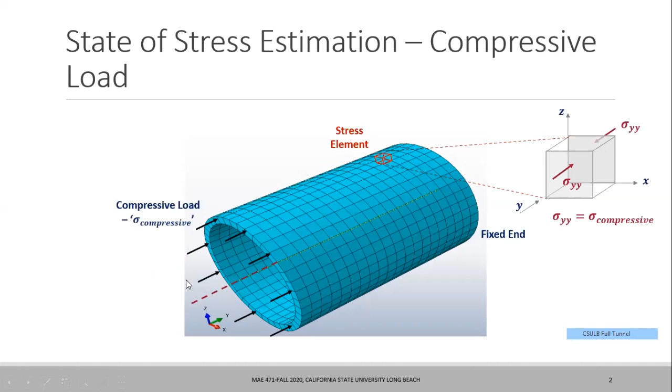If I go back one more slide, this is about the axial stresses. Here also you see sigma yy compressive acting on the back face and the front face, but there is no such increment of the stress being shown. It's just sigma compressive that's being applied. Coming back to shear stresses, back face and front face have the same magnitude, no increment or decrement.

But the moment I talk about the bending stresses, I am adding this delta. So can anybody try to attempt why it is happening?

Is it because the back face is fixed? Back face is fixed, but that is a part of the boundary condition. That is fixed in all the other cases too, so it is fixed in this case as well.

Wait, can you re-explain, Professor, how the previous one relates to this one? Can you re-explain how the torque relates to the other one, or what you said previously? The torque does not relate to the third slide.

This torque is basically you just twisting it. Imagine you are screwing or unscrewing a fastener, or just twisting the cap of a bottle. So you're applying a twisting moment, trying to rotate the cross section about its axis. That is what your twisting moment means here. Do you see what I'm saying?

Oh yeah, it's like if you're holding the end and twisting it. Yes, but when I'm talking about this bending load, I'm not twisting it. I'm just applying a load at the free end, just like a cantilever beam, pulling it in the negative z direction at the bottom. So I'm just pulling it.

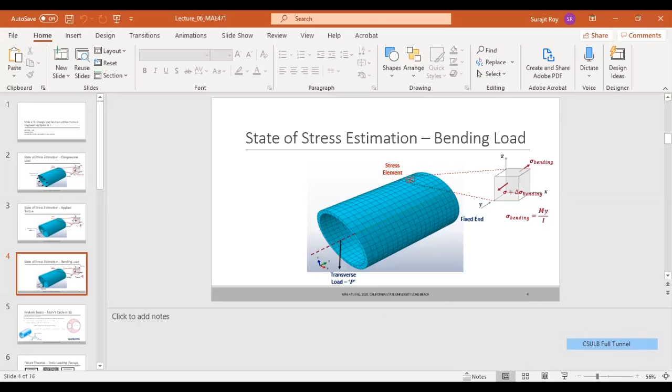Yes, that's the correct answer. So let me actually share the document and show this. If you see this specific scenario where you have a cantilever beam...

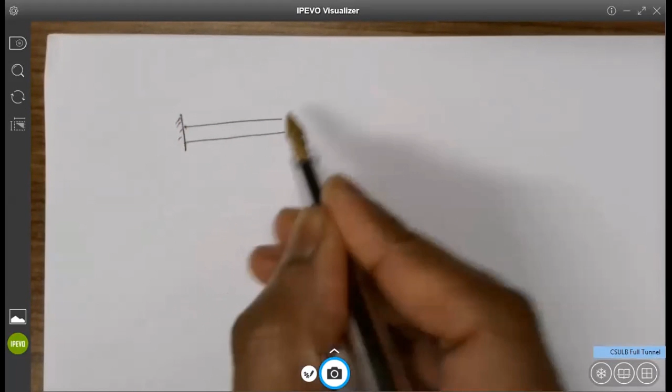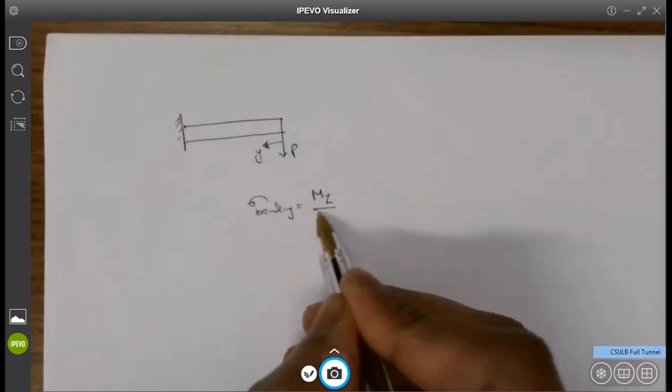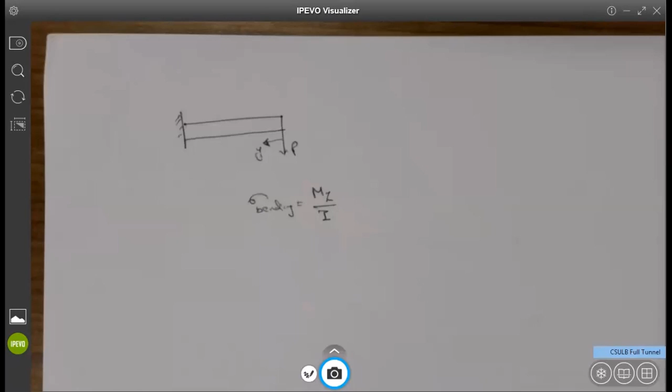Let's say this is y. Now sigma bending is given by mz divided by I, right? That's what it actually has to be - z, not y, in my slides. So it should be mz divided by I. Is everybody following it so far? What I'm writing here? Yes, we are.

So what should be the axis here? It should be z here. So it is z, and x is here. Let me know if this makes sense - the Cartesian coordinate system I'm drawing. It's a right-hand coordinate system. X-axis is across; this is the cross section of this beam.

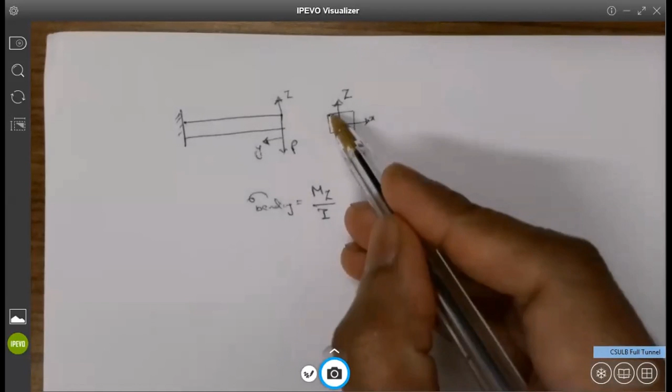X-axis, Z-axis, and this is the longitudinal axis. Y direction, Y coordinate is pointing this way, Z is pointing this way. Let me know if you guys agree with this. Yeah, yes, everybody is good, fine.

Now, what I am saying is that bending stresses, sigma bending - because of this, everybody agrees this will actually deflect just like a cantilever beam, where the top part will be in tension, the bottom part will be in compression. The tension stresses will be calculated by this formula: M times Z, bending moment times Z, where Z is the distance from the neutral axis.

So if this is your neutral axis, the stress is distance from the neutral axis divided by the moment of inertia, or area moment of inertia. Everybody agrees with me?

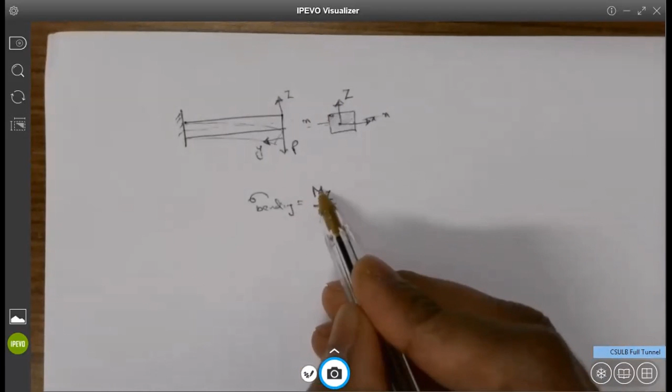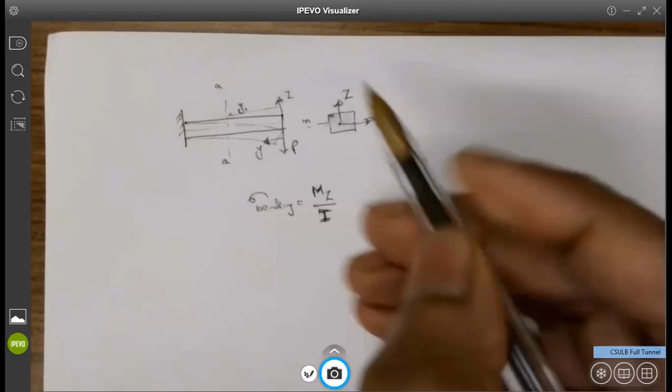Now, if you look at this specific term, bending moment is calculated at a specific distance from the free end. So at the free end, after a distance y1 from the free end, the bending moment at this cross section would be what? Bending moment at section AA would be P times y1.

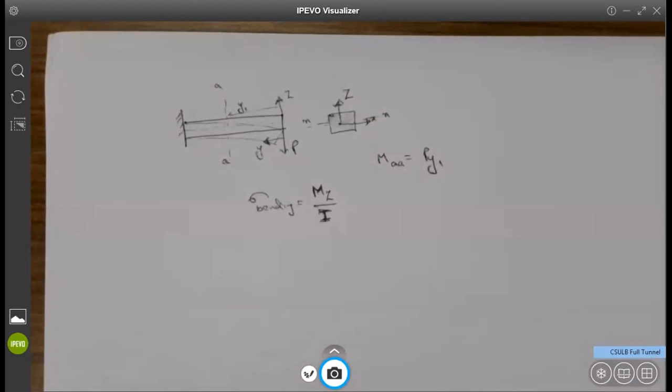And if I have a cross section slightly away from AA at a delta y increment, what would be my bending moment? My bending moment would be P, load remains same, but instead of y1, it will be y1 plus delta y.

Is everybody agreeing with that? And because of this, the stress at the front face will be a function of only y1, and the stress at the back face would be a function of y1 plus delta y. So because of the delta y increment, the bending moment actually changes, and because the bending moment changes, my stresses will also change.

Sigma AA would be MAA times Z divided by I. Sigma BB will be MBB multiplied by Z divided by I.

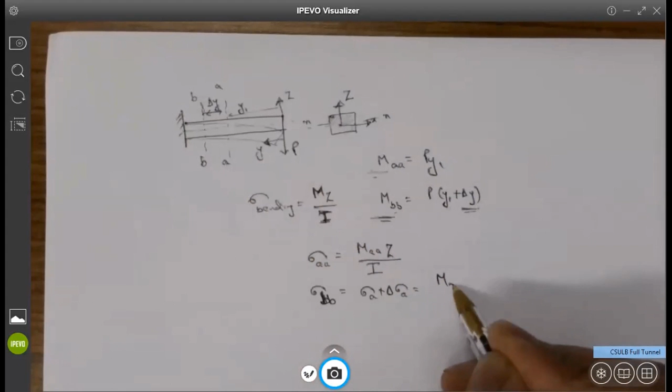Is everybody following what I'm trying to say? I'm asking everybody if you are following it or you are not. If you are not, let me know. If you are with me, then we will move to the next slide.

Can you just give us a sec to copy, Professor? I don't know about anyone else, but it kind of got stuck for a couple seconds while you were writing that bottom part. I believe it's the Wi-Fi signal causing issues, since I'm basically taking the class from the college, so I'm not sure how to increase that signal strength and bandwidth.

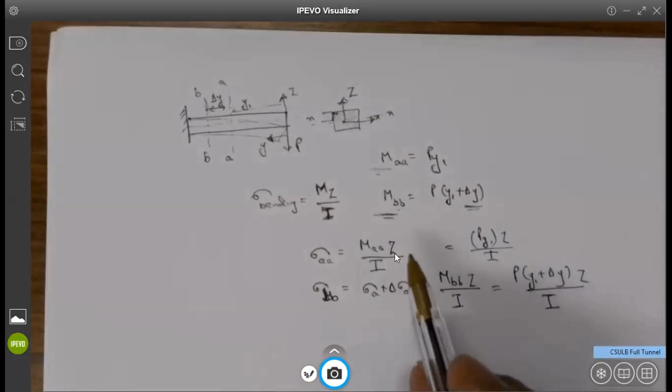So right under where you have stress AA equals the moment AA times that Z, what does that Z represent? Z represents a distance from the neutral axis. Oh, okay, it seemed like you were multiplying it as a variable, that's why I got confused. Sorry, that's okay. So sigma AA equals MAA times Z divided by I.

Is everybody with me? Any questions, guys? I just have one question. At the moment for BB, why is it y1 plus delta y, and why is it not minus delta y?

Because you are increasing the distance from the free end. You are basically calculating the distance from the application of load to this point, which is y1. Now you are incrementing delta y. Delta y can be positive or negative depending on which side you are talking about delta y relative to this end.

Since my y is positive, y is going inwards in this direction. That's why I asked you guys to make sure you agree with me on the coordinate system: y is positive going this way, z is up, and x is this direction. If you agree with me on this coordinate system, then delta y is positive going this way. Okay, that makes sense, thank you.

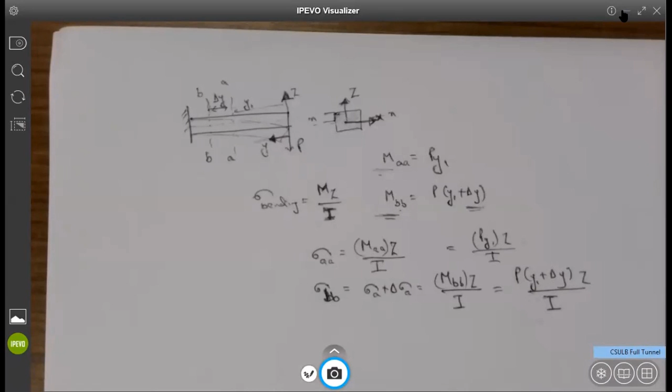Okay, so everybody agrees now, or understands why I put the delta increment here. Now I just changed here, Z, it has to be Z in the slides I uploaded to Beachboard. It's not Z, it's written Y. It should not be Y, it should be Z, so you have to make the correction, or I will upload the new slides later on.

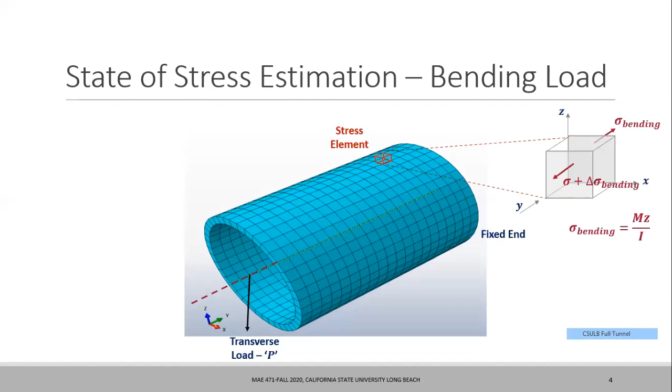Okay, so with that said, this clears some of the concepts we've been covering so far about stresses due to independent bending moment, independent twisting moment, and independent axial stress. Now, most of the time, in the design of machine components or any engineering or structural component you work with, the loads will be a combination of bending, twisting, and axial. You will never have a situation where it is only bending, or only compressive or tensile, or only twisting.

If you have all different combinations of loads appearing, what type of stresses will be appearing in the material, and how do we take into account all the different combinations of stresses? That is why we talk about the Mohr circle. Last time we talked about how the Mohr circle can be used to determine the principal stresses and help us identify which plane or how the failure will take place in a material. For ductile materials, we saw that they are weak in shear and basically fail at the value of the maximum shear stress.

If you have a Mohr circle, imagine we always constructed it using the planar case. For a 3-dimensional situation, you have 3 Mohr circles, corresponding to 3 planes: XY plane, XZ plane, YZ plane.

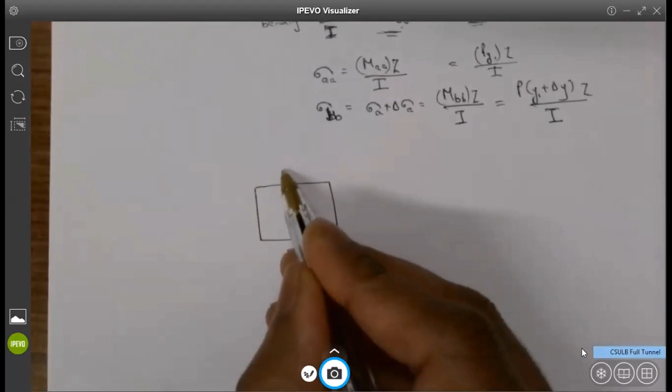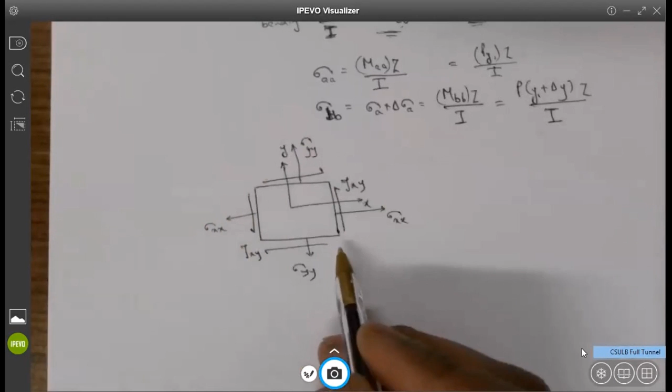While we were having our discussion on the Mohr circle, I told you we are going to talk about the XY plane. I have sigma XX, I have sigma YY, then I have tau XY. This is a representation of stresses in plane, a planar representation of stresses.

Are you guys with me so far? Yes, instead of working on a three-dimensional situation, I'm talking about a plane. Now, plane is only the XY plane. I can also have the YZ plane, I can have the XZ plane.

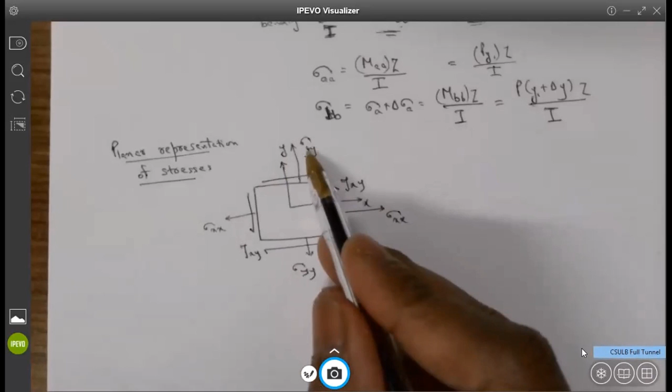If I have the XZ plane, then instead of YY, I will have ZZ. We've had this discussion about how the change in axis or plane will change the subscripts. So if I have the XY plane, I have sigma XX, sigma YY, tau XY. If I have the XZ plane, it will be sigma XX, sigma ZZ, tau XZ. So depending on which plane you are in, you will have these subscripts.

Now for one plane, let's say the XY plane, you can also call this the 1-2 plane. You know we talked about the Mohr circle representation where we have all the normal stresses on the horizontal axis. This is tau clockwise and this is tau counterclockwise. I hope you understand by now what tau clockwise and counterclockwise means.

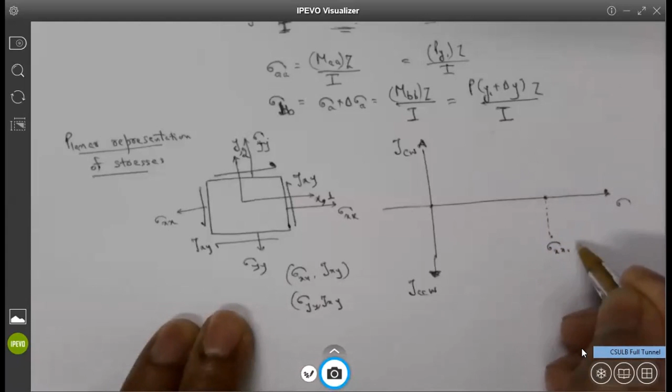To draw the Mohr circle, we take 2 points: sigma xx and tau xy, and another point would be sigma yy and tau xy. We mark the first point, assuming that tau xy with sigma xx is counterclockwise, so this is sigma xx, tau xy. Similarly, we have another point which corresponds to sigma yy, tau xy.

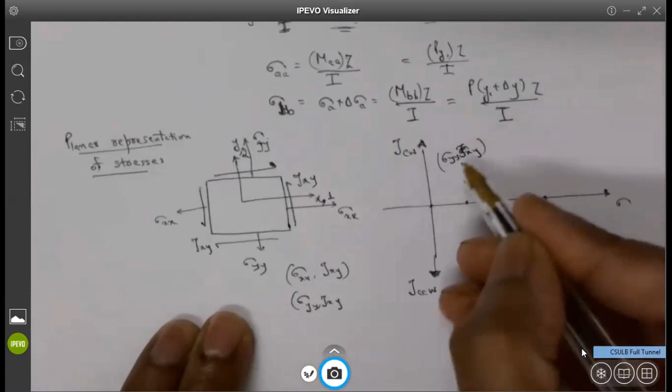And we got these 2 points. We draw a straight line connecting these 2 points. The center of this line, where it intersects the x-axis, will be the center of the Mohr circle. Having that as the center, you can draw a circle, and that represents the Mohr circle here. When this circle intersects the horizontal axis, that becomes your principal stress. So let's say this is sigma 1 and this is sigma 2, and correspondingly, the maximum shear stress you are getting is tau 1,2 max.

Is everybody following it so far, what I'm trying to say? Any questions so far?

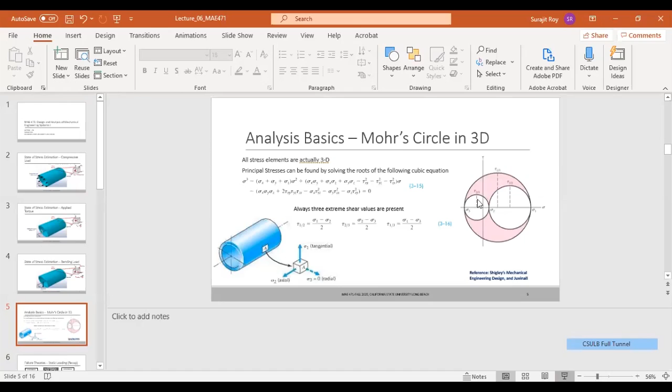Now, what we are doing in Mohr circle for 3D, we are doing the same thing for 1,3 and 2,3. So let me go back to the PowerPoint slide. Here you will see you have one circle for the 1,2 plane, which is the XY plane, another circle for the YZ plane, and another circle for the XZ plane. So there are 3 circles, one for each individual plane. This is what you get when you can no longer represent the stresses in planar coordinates, when you have stresses in all 3 dimensions, because the load is very complex. The complicated loading in a specific geometry causes stresses in all different directions, and then I cannot assume my stresses are only confined to a planar form.

Okay, are you guys with me? Yes, we are.

So looking at these 3 circles, if somebody asks you, if a material is ductile, at what value of shear stress will the material fail? What would be your answer? We already discussed that a ductile material fails at the maximum shear stress. So which of these is the maximum shear here? Tau 1,3, right? And it is this value of shear that determines whether the material will fail or not.

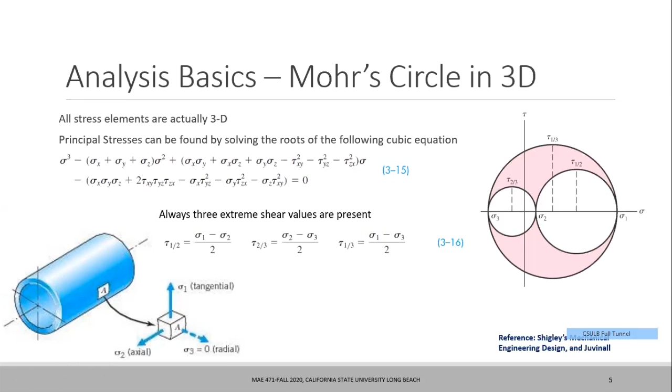Okay, assuming we are all good so far. Now we are switching gears, and we are basically discussing these types of stresses. So far we have been interested in understanding that given a specific geometry, given a specific loading scenario—whether it is uniaxial load, bending load, or twisting load—what type of stresses will appear in a material, or where those stresses are maximum.

Is it normal stresses or shear stresses where they are going to be maximum? Can we use the Mohr circle to determine those stresses? After we obtain these stresses, the next thing we need to do is determine when and how the failure in the material takes place. If we understand the stresses appearing in the material, can we predict the failure? What type of failure will happen, and when will it happen?

There are different types of fractures or failures, primarily classified into two components. One is called ductile fracture, also called cup and cone fracture. Here you see a cup type behavior and a cone, at 45 degrees inclination. We tried to understand why it happens at 45 degrees in the last lecture, because the maximum shear stress happens at 45 degrees to the applied uniaxial load. That's how you get this cup and cone fracture, and this characteristic is called ductile fracture.

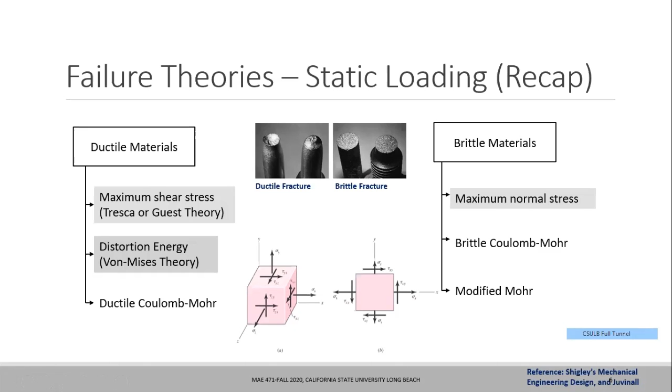If I move ahead, in ductile material, as I was mentioning, you have this cup and cone fracture, and the failure that happens is slipping of the planes. You basically have slip planes where the slipping happens, and the material slips along these planes. This slipping basically means one piece of material is sliding on top of the other, and when they are sliding, it is the shear stresses that are prominent.

It has been observed microscopically that in ductile materials, there is slippage of the crystal planes. Because of this slippage, it is assumed that failure happens because of shear, since sliding surfaces develop shear stresses. If you have high resistance to this slippage, the material has high strength. If you have low resistance, the material will just yield and plastically deform very easily. That's how ductile materials actually fail.

I see one chat window. What is T13? Sorry, that was the maximum from the Mohr circle you had earlier. Yeah, okay, sorry, I am not following some of the chat windows.

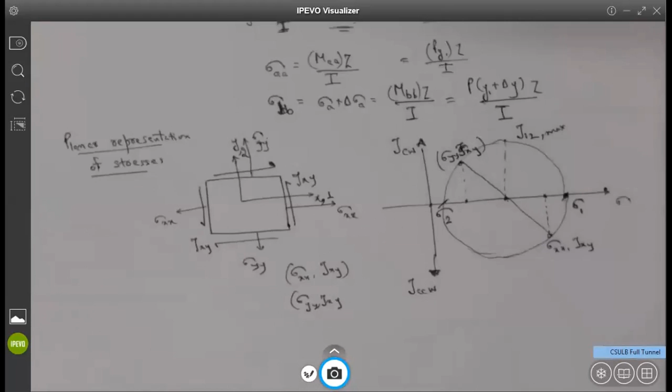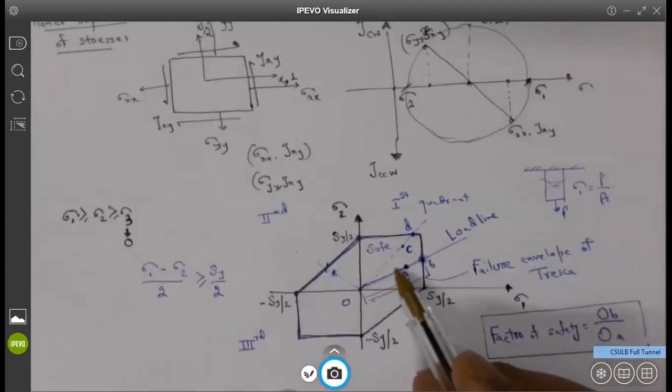Okay, so that is what the load line basically means. Load line means that the stresses can be increased in the same proportion. Sigma 1 and sigma 2 are getting increased in the same proportion, the slope remains constant. This is sigma 1, this is sigma 2. If you keep on increasing along the same line, the sigma 1 to sigma 2 ratio remains constant.

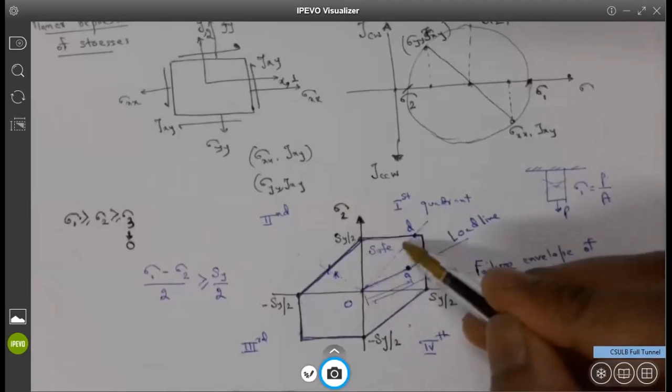This load line, the ratio of sigma 1 divided by sigma 2, or sigma 2 divided by sigma 1, whatever it is, the slope y over x, delta y over delta x, if it remains constant, that is what you call proportional loading. That defines one load line. Is it making sense, guys?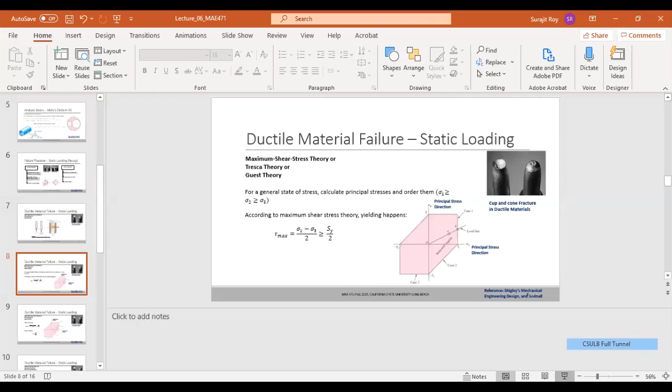So this is showing case one, where sigma 3 is 0. In this case, both sigma 1 and sigma 2 are positive, so the envelope will be a straight line like a square. But if you're in the quadrant where sigma 1 is negative, the failure envelope will be a triangle. So you have a square here and a triangle here, and in totality it forms a hexagon.

This is the failure envelope of the Tresca theory. The shaded region you are seeing is the non-yield region, meaning the material is not yielding - it is safe and elastic. The moment you exceed the failure envelope, yielding will take place, meaning the material starts plastically deforming, and that means failure is taking place in the material.

Okay, so here is the same thing that we have been doing.

I was showing how to calculate the factor of safety. If you keep increasing the load line such that the ratio of sigma B and sigma A remains constant - the slope remains constant - then the factor of safety can be calculated by the length of the line where it intersects the envelope, divided by the actual current coordinate. So if your current coordinate is at point A, the length OA will be in the denominator, OB will be in the numerator, and you can calculate the factor of safety by that.

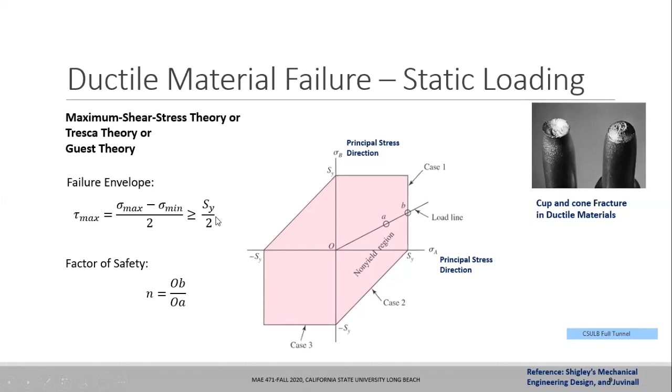So this is your shear stress, which is basically the maximum shear stress for calculation, and this has to be greater than or equal to half of the yield strength. So we call this number 0.5 times SY as the shear yield strength, SSY. And for von Mises stress, because of the calculations, if sigma 2 is 0 and sigma 3 is 0, you find that this takes place at 0.577. That is what we call the shear yield strength.

Okay, I get it. Any other questions, guys?

Okay, so the last failure theory we are doing is for brittle materials. For brittle materials, there are different theories, but the most common is the maximum normal stress theory. What it says is you calculate the principal stresses, arrange them in order, take the maximum, which is sigma 1, and if sigma 1 is greater than the ultimate tensile strength of the material, failure will take place. Or you take the minimum of them and compare with the compressive strength of the material, the ultimate compressive strength.

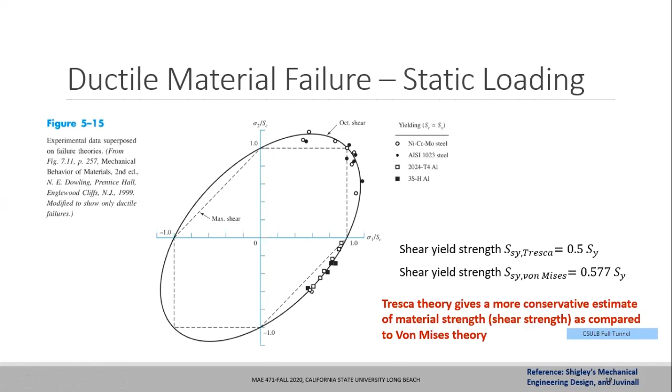Okay, so SC represents here actually SY, yield strength, that's what I was referring to. So different material will have different yield strength, so the envelope will be increasing or decreasing in its area. But if you normalize the axis such that it scales from 0 to 1 and 0 to 1, then all the material data points can be described by one figure itself. Are you guys getting what I'm trying to say? Yeah. So that's a good question actually.

Any other questions, guys, so far? I have a question, go ahead. The sigma A and sigma B, is that coming from the Mohr's circle? Yeah, it is coming from the Mohr's circle, or there are equations that you can use to calculate those principal stresses.

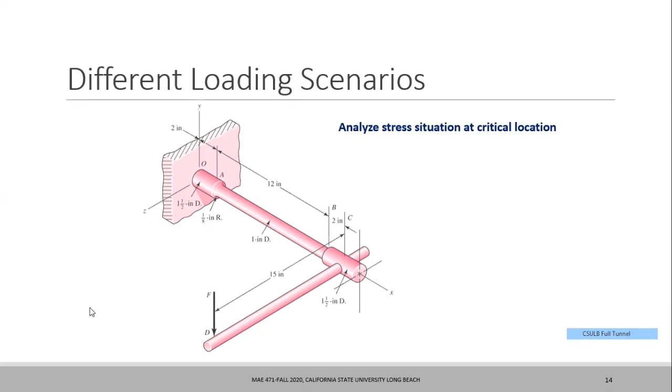Okay guys, are you able to open the SolidWorks files or components in the software? Yeah. Okay, so let me do the same thing here.

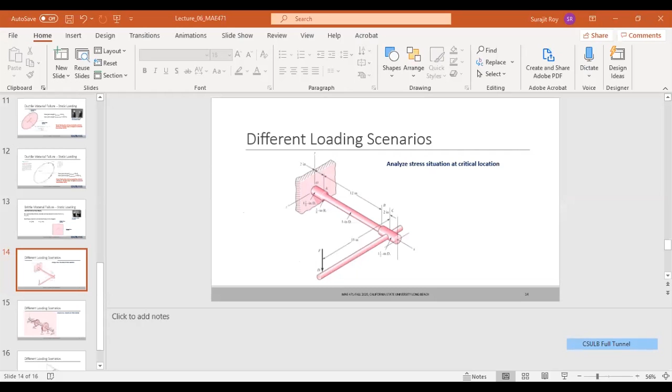Okay, so if you have uploaded that, what I did, I just created specific components here. So you have this rod, and this is another rod which gets assembled, so there are two parts. I did the static simulation. It is just like a wrench, or you are designing, let's say. You have one end fixed, and you are applying load from this end. And if that is the scenario, what is going to happen?

So basically, I have defined the material properties for these two parts. This is the first part, and this is the other part, the rods, plain simple rod. The connections have been defined here, fixtures, it is basically fixed at this specific location, and then I applied a load of 100 Newton from this end. So if that is the situation, and I created the mesh and run the simulation, you will see the stresses. Now here there are 3 plots. By the way, are you able to see this SolidWorks screen I am showing? Yes, we can see it. Okay, great.

So I just thought I am not sharing it. I'm just saying things which don't make sense to you guys.

Okay, the first thing you will actually see if you run the simulation is you will end up with these type of stresses - the von Mises stress, which I just explained how it is calculated. It is given by these magnitudes, and this is the representation of the von Mises stress here. SolidWorks also tells about the yield strength.

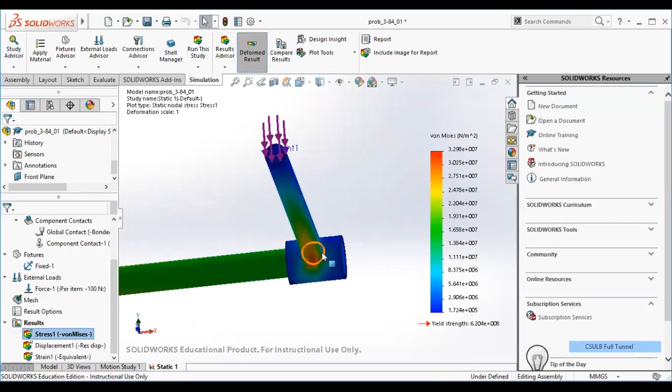Is everybody with me so far? Yeah. You can actually see that the von Mises stress is maximum at this point and also at this point, because this is the contact area, and the stresses are a bit maximum at this location.

So if I have to ask you, if you have not seen this contour plot or stress plot, what would be the critical locations in this specific design where failure would take place? Good point. Sorry?

For sure, it's a trivial question to ask that wherever you have the maximum von Mises stress, those are the critical locations. You have maximum von Mises stress at this region, and you have maximum von Mises stress at this region. So basically, failure is going to happen at these specific locations in this design.

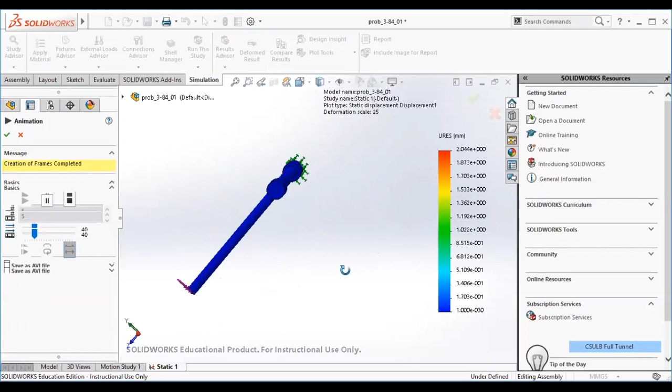Now let me show you the animation of the displacement, because that's what is always important. If you see, the displacements are happening such that as you apply the load, this is getting bent, and because of this bending, the loads are getting shifted to this wrench as well, or this rod as well. This rod is being subjected to both bending as well as twisting.

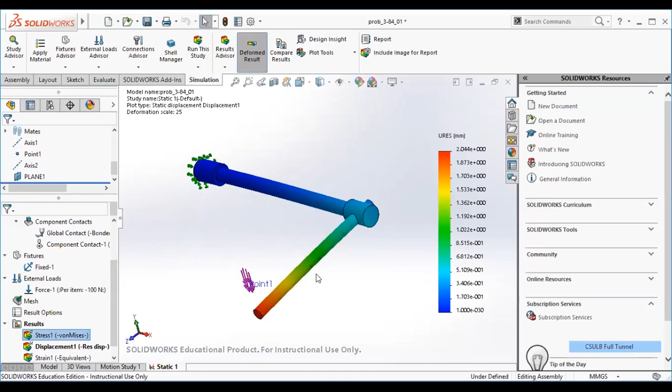So today, what we are going to do with this simulation exercise is make sure we understand, or have some handle on, the stresses. Can we calculate these stresses, the von Mises stress or the principal stresses, based on the geometry of the figure and based on the load, and see whether that matches the simulation values?

So instead of just going with the von Mises stress, what we are going to do is first find the normal stresses. But before I describe the stress calculation in detail, let me go back to the document camera and discuss the dimensions and what the geometry looks like.

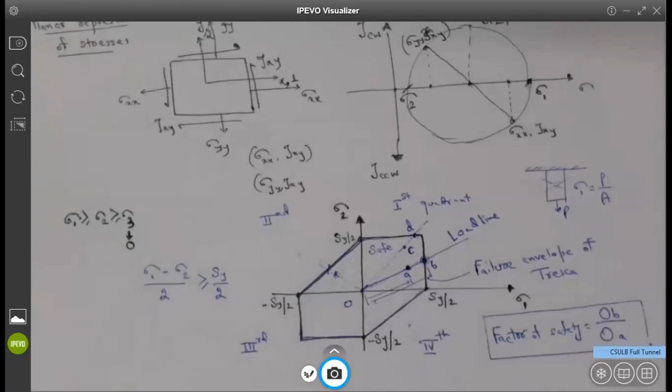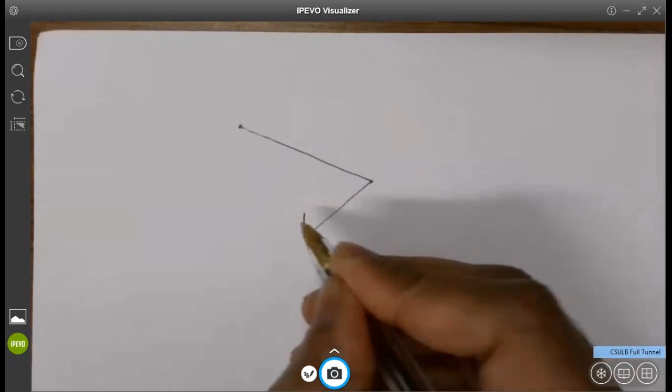So basically what we have here is a system with this rod, and let me give you the dimensions. I'm not making the actual representation, but it is an L-shaped rod which has got a load of 100 newtons.

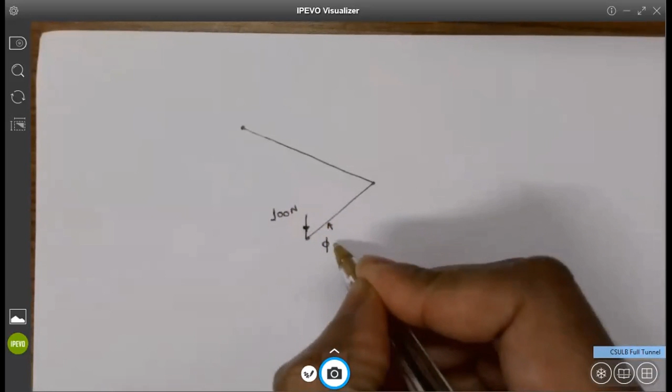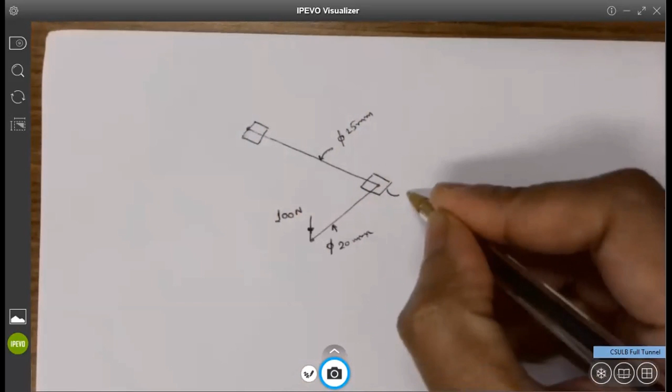Let me give you the dimensions. The diameter of this rod is 20 millimeters. This rod has got two sections, one bigger diameter and one smaller diameter. The smaller diameter is 25 millimeters, and the bigger one has a cross section of 38 millimeters.

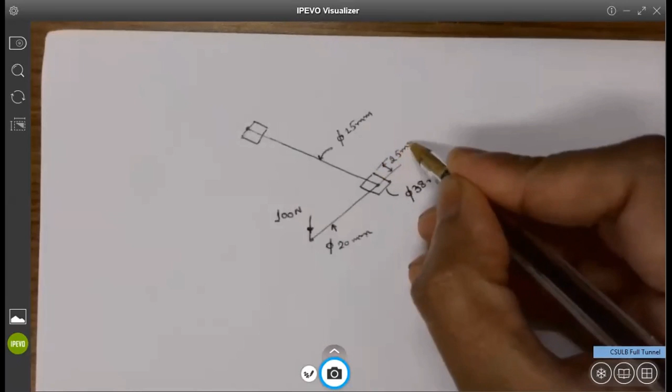You can measure this using the model itself, but since I created this model using these values, I'm just writing them here. This is 25 millimeters, and the length from this portion to this portion is 330 millimeters. I did everything in millimeters - the dimensions you see in the PowerPoint slide are in inches, I just converted them to millimeters to make sure all the dimensions are consistent.

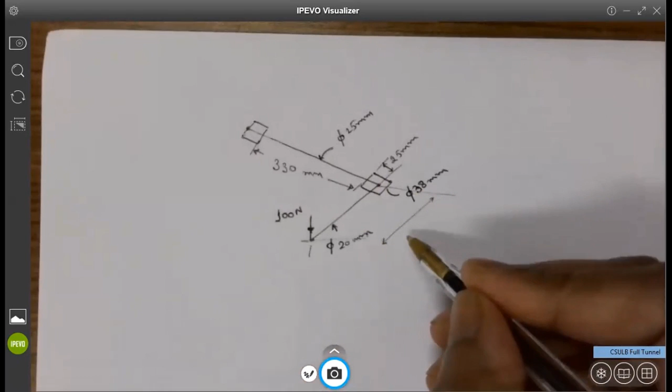Okay, and this length is 300 millimeters. Actually, I've used 275 millimeters based on my assembly.

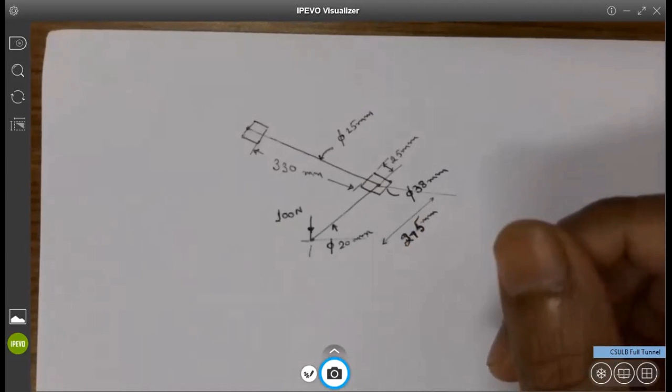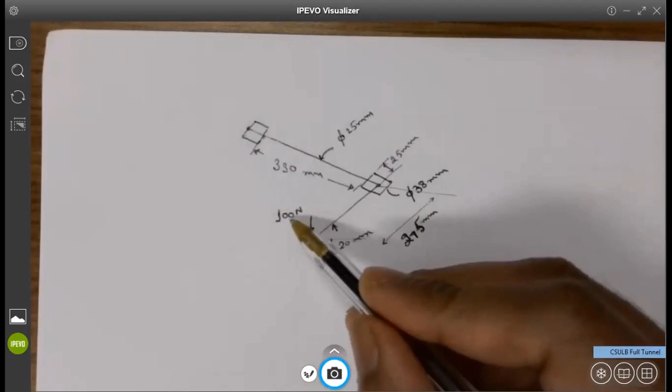Okay, so what I was basically concerned with is: if I have to calculate the stresses in the material, how can I calculate that? First, you know that you can make a free body diagram by replacing this load at this end by a bending load and a twisting moment.

So it can be replaced. This end is fixed. So it can be replaced with P equals 100 newtons, along with a twisting moment T given by 100 newtons times 275 millimeters. Is everybody so far agreeing with what I'm trying to say here? Yep. Yeah. Yeah.

So given that, can you find the stresses at this location, which is distance 355 millimeters away from the point of application? How to calculate that? If I have to calculate the stresses, what I know is that I have two types of stresses.

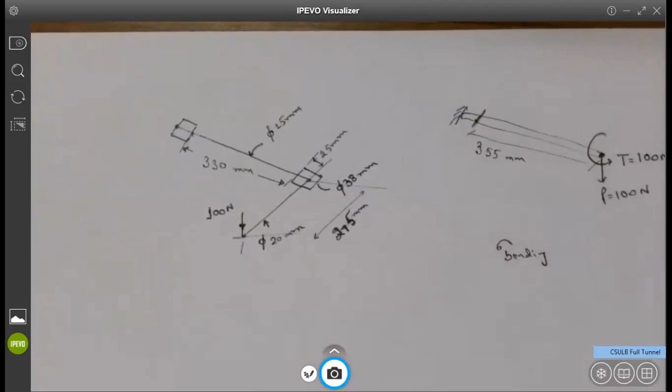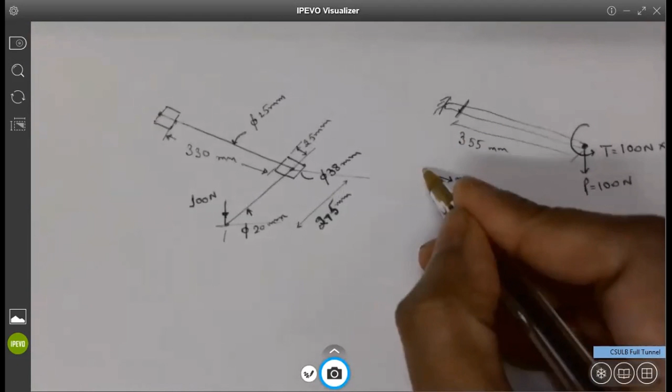Sigma bending, and that will come in the direction of the axis. So the direction of that is basically x. The coordinate system in SolidWorks simulation is x, y at the top, and z like this. So sigma bending will be calculated as M y divided by I.

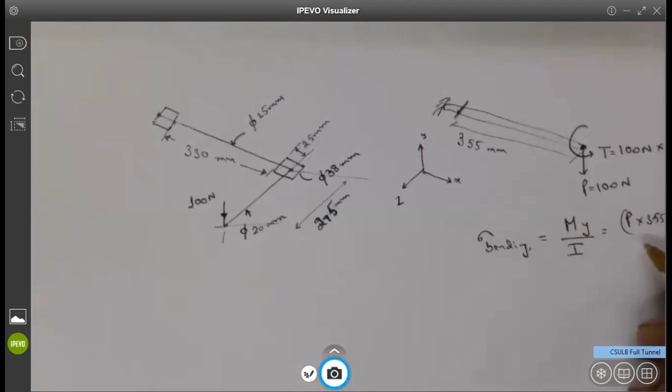For circular cross section, it will be P times 355 millimeters. Y will be d divided by 2. I is pi d^4 by 64. So it basically comes to 32 times P times 355 by pi d cubed, Newton per millimeter square. That will be your bending stress.

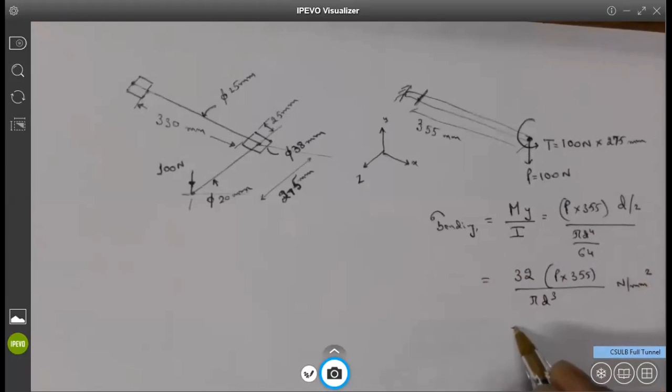Can somebody calculate this number, please? Where d is your diameter, which will be 25 millimeters. So 32 times 100 newtons times 355 millimeters divided by pi times 25 cubed, Newton per millimeter square. That will be the bending stress. Can somebody tell me what the number looks like for this?

I got 23.14. Okay, 23.14 Newton per millimeter square. I got the same, with the bending stress.

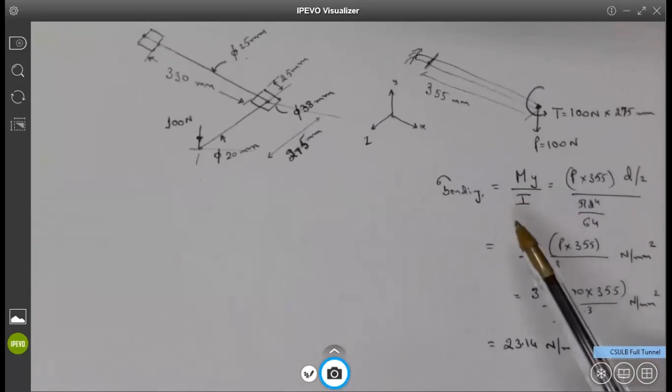And what would be the direction of this bending stress, guys? Or rather, let's go back to the software SolidWorks simulation and tell me what stress I should be looking at. So if I go back to my SolidWorks simulation, I am in this stress plot.

Do you guys see what I'm trying to ask here? Can anybody volunteer and let me know what the bending stress will be in which direction? Is it in the y direction? Y direction is basically up, and when bending happens, how does it happen on this rod? This basically deforms like a cantilever beam, right? So when it deforms like a cantilever beam, what should be the direction of the stresses?

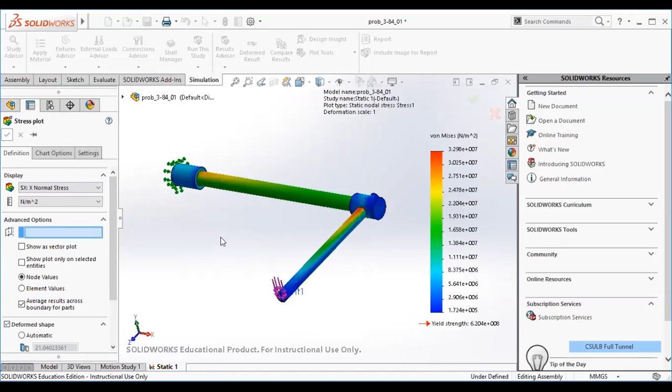So if I actually go to the edit definition and select sigma X, what value are you getting? 2.569 E7 Newton per meter square.

And how much are you calculating? What is the value calculated? 23.14, right? And that is equal to 2.314 E7. That is very, very close.

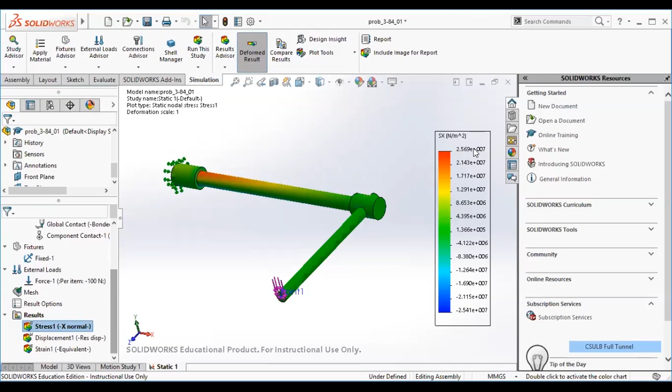And if you look at that, you see the top part is in tension, the bottom part is under compression, almost the same magnitude. Negative 2.541 E7 at the bottom, because the bottom part is in compression in the X direction. Remember, it is in the X direction that the shortening and compression happens, and in the X direction that the tension happens. So on the positive side, you have 2.569 E7, and what we calculated is 2.314, which is pretty much close.

I mean, there will be some difference because we are not using a three-dimensional stress situation. This finite element model uses a three-dimensional stress situation; we are only using the simple bending formula we learned from the 373 class. And still we see that we are in the same ballpark range as the simulation values give us. Are you guys following, everybody in the class?

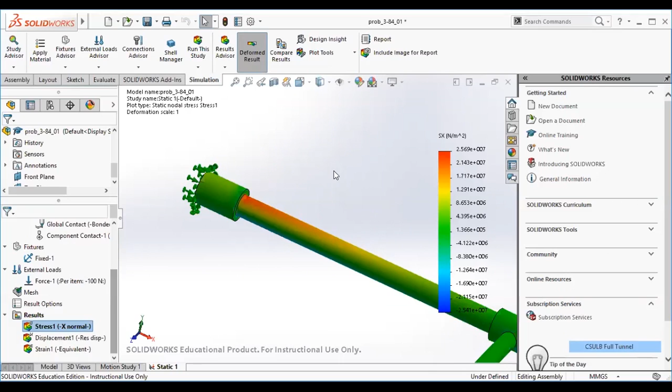If you take any other stress value, whether it is sigma y, sigma z, or tau xy, you will never be able to match this value that will come in the bending. And this is what we actually know from bending: the top will be in tension, the bottom will be in compression.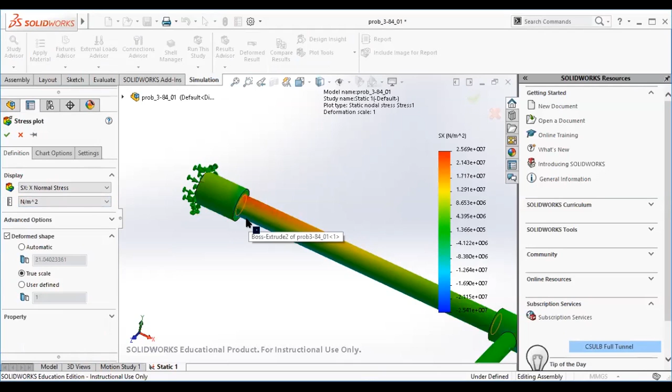If you take sigma y, it is an order of magnitude less. You see, it is 9.37 E6, and we have 2.5 E7. We have one order of magnitude less value, so it is no longer in tension and compression. There are some pockets, but it is not a bending stress—it is actually some contact stresses that are happening.

Are you guys getting what I'm trying to say here? So that is the reason I was basically emphasizing on the subscripts, that you guys must understand the subscript.

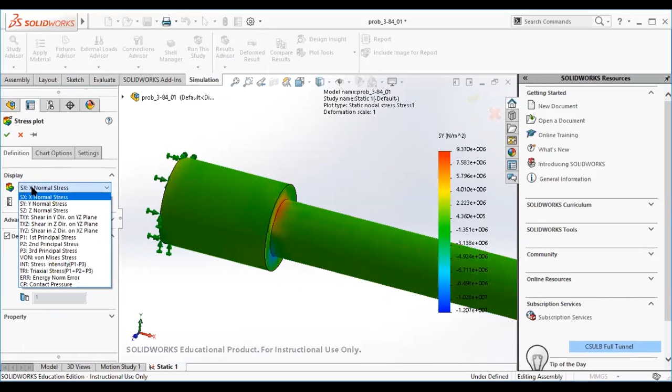Otherwise, if somebody asks you to do the simulation, you can do all the simulation, but if somebody asks you to interpret the results, it becomes difficult to interpret if you do not understand that this sigma due to bending is in the x direction, sigma x, not sigma y or sigma z. So that is what you guys basically need to focus on: what should be the subscript of the stresses based on the applied load.

So far you actually know how to calculate them, but what we need to do is make sense of the results from the simulations. And you cannot make sense of the results unless you know that this is sigma x—it is positive on the top, negative on the bottom, but it is sigma x in the x direction, because stretching and compression is happening in the x direction.

Okay, now let's go back to the document camera. So I just calculated bending stress because of this load. Now this is still remaining, the twisting moment.

Can anybody tell me what the twisting moment causes, what type of stresses it will cause at this point? Shear stress? Shear stress. And how to calculate that?

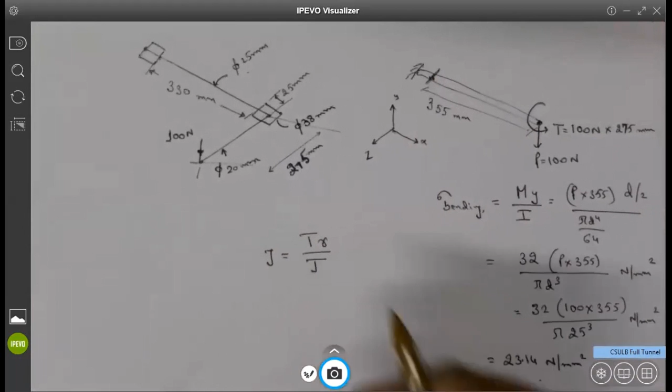We know that shear stress due to torsion is given by T times R divided by J, where J is the polar moment of inertia. Now T is going to be 100 newtons times 275 millimeters.

I know this number, 275 millimeters, because I assembled the parts that way. You can measure it in the model itself, you will find this number. Otherwise, if it is a different number, you will let me know what that number is.

Anyways, if I use this formula, Newton millimeters, R is D over 2, J is pi D4 divided by 32. Polar moment of inertia for circular cross section is given by this formula. I'm not expecting you to remember this, but at least for circular cross section, it's quite useful to remember that actual area moment of inertia is pi d4 by 64, and for polar moment of inertia, it's pi d4 by 32.

So if I simplify, it comes out to be 16 times 100 times 275, 16T divided by pi d cubed. Now d is again 25 millimeters. Can somebody tell me what that number will look like?

What we are calculating is shear stress, tau, tau, and tau.

17.50. How much you get? 17.50. Is everybody getting the same number?

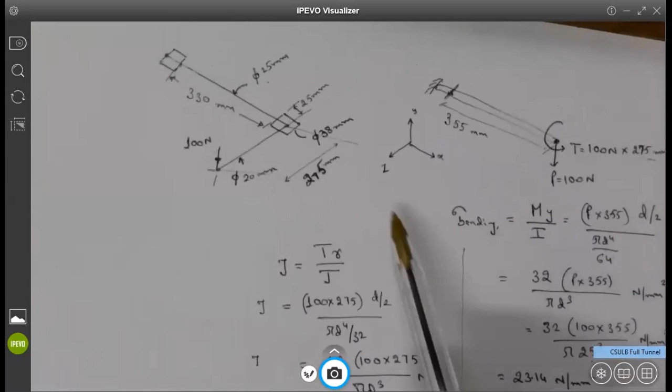I got something else. Is the diameter still 25? Now it's 20? Oh, okay, that's why. It's 25, we are calculating on this specific section. My bad, that was my mistake.

Yeah, so what is that value? It should be 8.96. 8.96 Newton per millimeter square.

Okay, now let's go back to the simulation and see what value we are getting there. But before you actually go back to the simulation, you have to tell me what is it—is it tau xy, tau yz, or tau xz? Without that, you cannot match. You cannot basically predict what is going to happen.

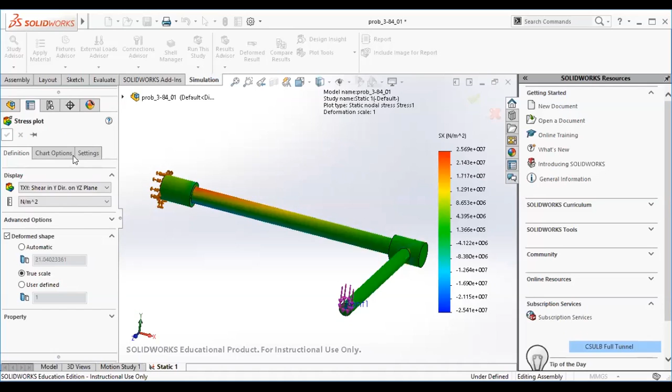And you can easily verify that tau xy would be coming on the top face and the side face, this left face and the right face. So if I just press yes, you will see that the value is very high. It is not exactly the value we have calculated.

And the reason being, am I making any mistake here? Give me a second. The values that you are actually seeing is 1.4, and what you calculate is 8.96. So that is still not the exact value.

XZ, okay, here it is. No, that was making sense as well. I will explain in a bit what the problem was. So tau xz is basically on the top and on the bottom. On the top we have 1.007, which is basically 10 Newton per millimeter square. What you calculate is 8.96, which is 9 Newtons per millimeter square on the top and on the bottom.

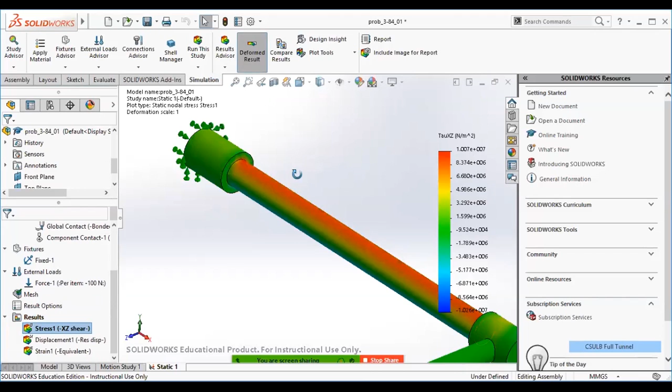Now, because of twisting load, you have the same coming on the side, but because of the extra bending, the shear stresses at the sides, which will be the tau xy direction, would be a bit more than this 1.007 or 10 Newtons per millimeter square. I don't know if you are following me or not. I think I am, because you also have deflection, correct? Yeah, you do have a bending load.

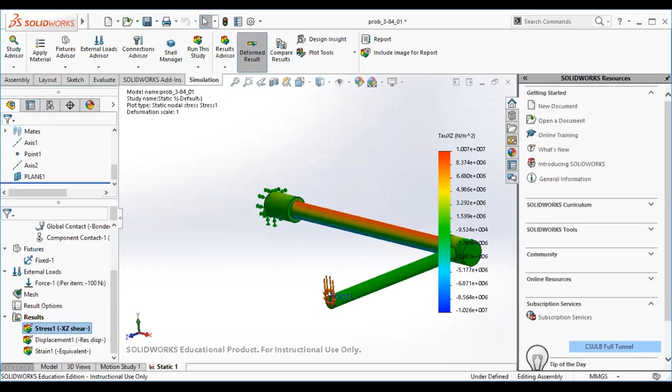So let me actually quickly wrap up our discussion for this evening by going back. So this is the twist, this is the shear stress happening due to twisting moment. Now there is shear due to bending as well, because of this bending load. We know that the bending shear stress due to bending follows like this basically. So this is your x, and it is 0 at the top, 0 at the bottom.

So that means at the very top, you only have this shear due to twisting. But at the side, if I have a side like this, I'm not sure if I am making sense with this schematic. So this is your x, this is your y, this is your z, and at this point and at this point, it will be shear due to torsion only, nothing else.

That is why this value in simulation was 10 Newtons per millimeter square. Our calculation was 8.96, which was 9 Newton per millimeter square at the top and the bottom. But at the side, at this side and this side, and at the top and bottom, it will be tau in this direction, and this direction, it will be tau xz, and at the bottom as well tau xz. And sideways, it will be tau xy.

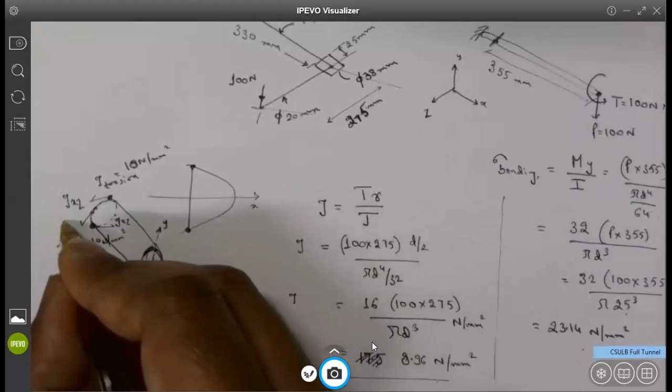But apart from torsion, this bending shear stress due to bending will also appear, and that will cause it to increase in magnitude. I don't know if you are following it with me or not. I will try to explain this specific example and scenario in the next lecture, because I think we are overshooting our time at this point.

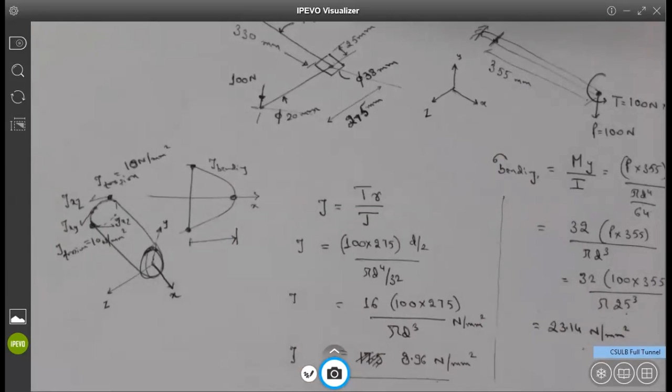So we will come back to discuss this, but the overall reason I was trying to make sure you understand this specific subscript is because without understanding which shear stress it is, whether xz, yz, or xy, the values will not make sense to you. If you look at tau yz, it will not make sense to you.

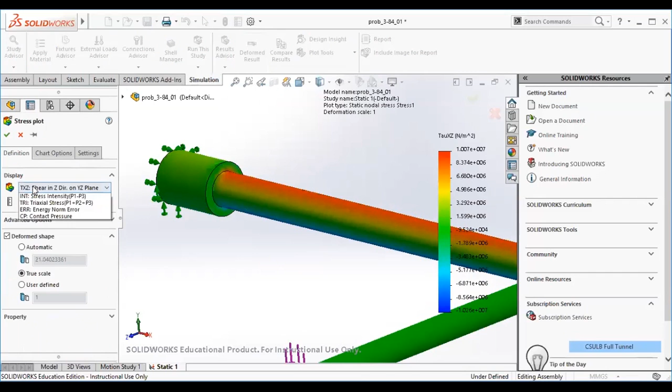And now we know that basically the reason is that this is due to the bending plus twisting, and that is why it is more than the 10 Newtons per millimeter square that is coming in the top and bottom. I don't know if it still makes sense, but we will resume our discussion from this point onwards in the next lecture.